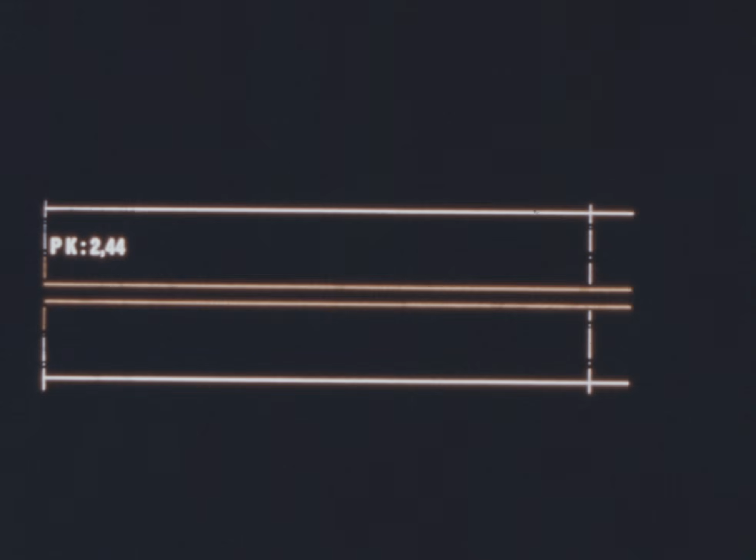The roadway was originally built with 2 lanes, in sections starting from Paris between 1958 and 1966, in the departments of the Val-de-Marne, the Essonne, then of the Seine-et-Marne. Later on they were widened.

The importance of this route and the age of the road surface led the Cetra to organize an operation of continued monitoring on the sections under its control. The West Parisian Regional Laboratory has perfected and applied a method of examination which revealed as early as 1974 some unfavorable situations concerning the support of the slabs.

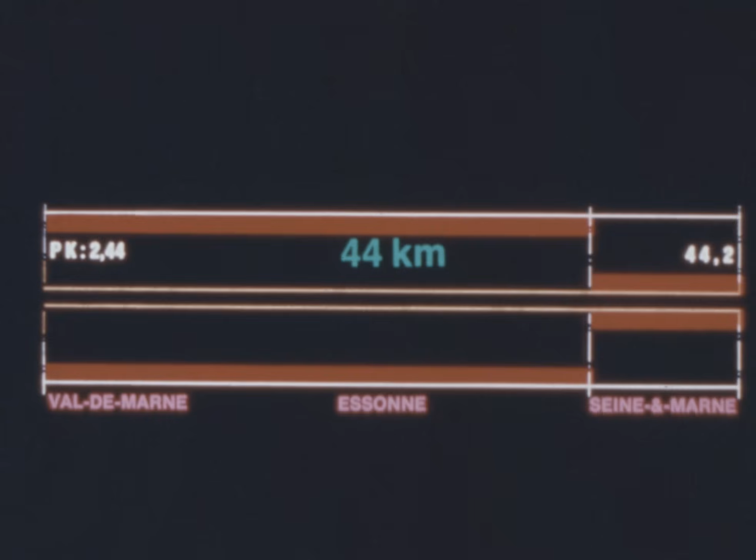Surveys effected in 1977, 1978 and 1980 by means of the GERPHO confirmed that certain sections of the A6 freeway had reached a critical phase of evolution. The diagram of the development of the deterioration factor resulting from these measures illustrates this.

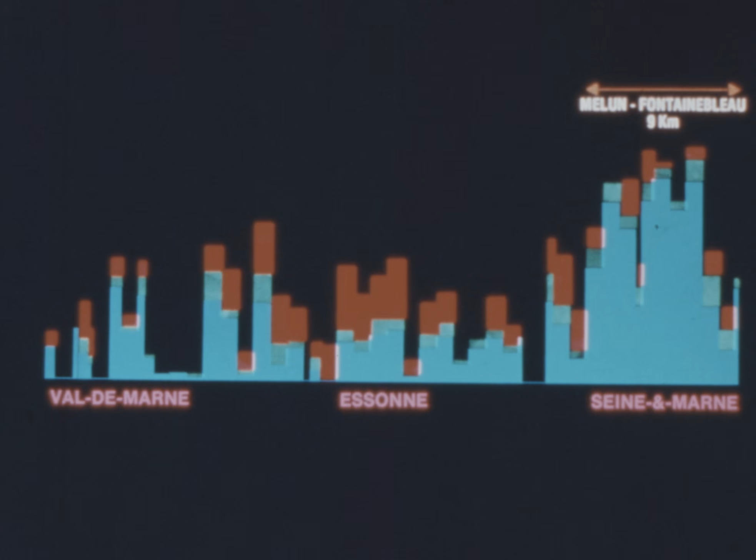A work program was determined for the entire route. It was decided that in 1980 priority would be given to the section situated between the junctions at Melun and Fontainebleau, a distance of 9 kilometers on the Paris-bound roadway.

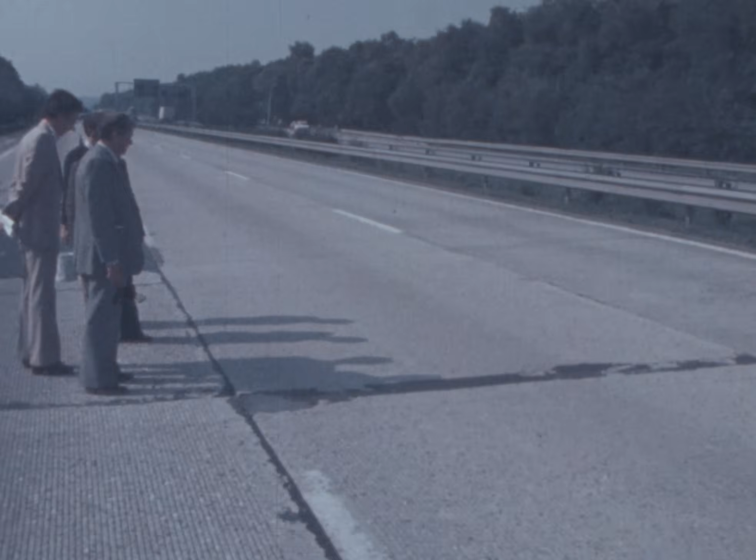Closer investigation led to a decision to keep a part of the treated shoulder for emergency stops and to maintain the middle lane in its present state on condition that some of the slabs should be repaired.

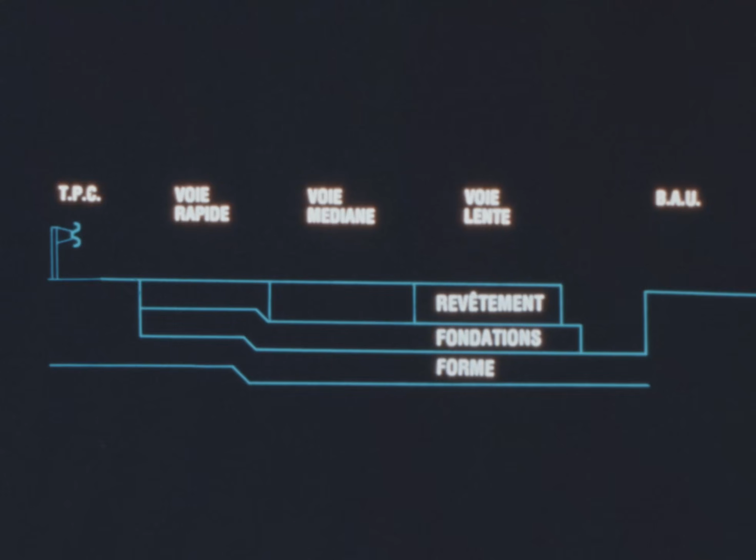A list of the faults, drawn up slab by slab, proved to be a most useful work document during the construction period. The following measures were specified in the work contract: demolition of part of the treated shoulder for emergency stops, demolition of the slow lane comprising a concrete surface 28 centimeters thick on a 15 centimeter cement treated base,

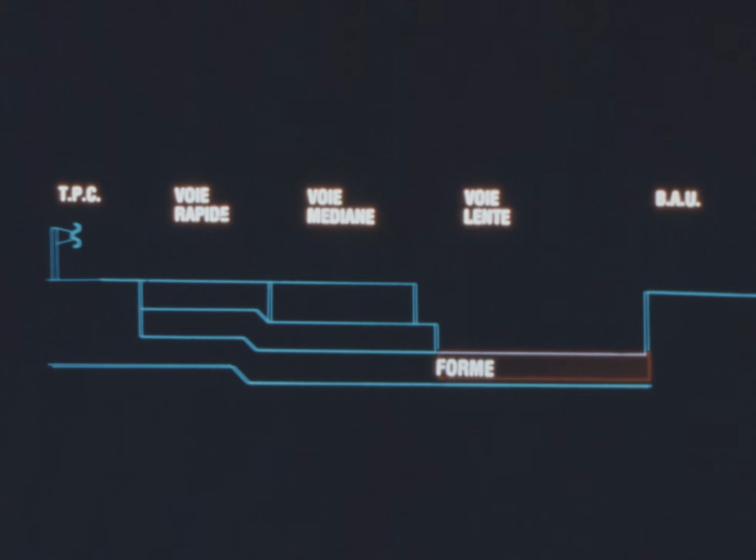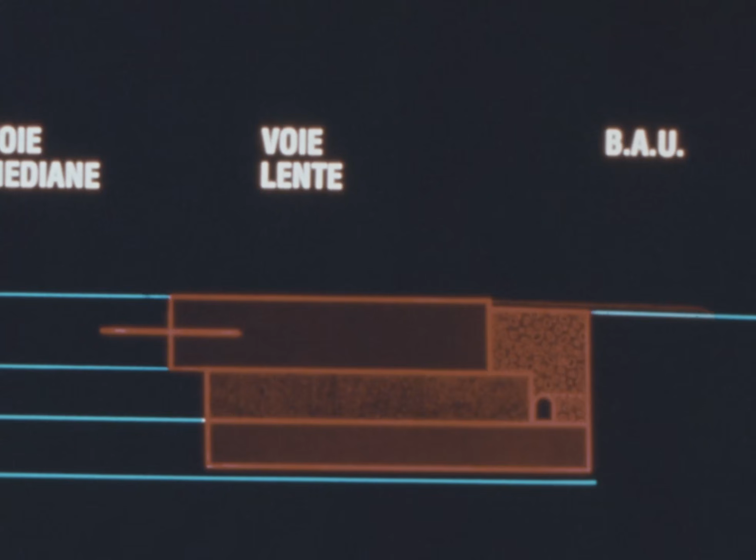preliminary treatment of the sub-base to a depth of 30 centimeters, reconstruction in accordance with the indications of the structural list, 15 centimeters of lean concrete base, 28 centimeters of concrete surface layer, establishment of a treated shoulder for emergency stops with drainage, renovation of some 100 slabs in the middle lane,

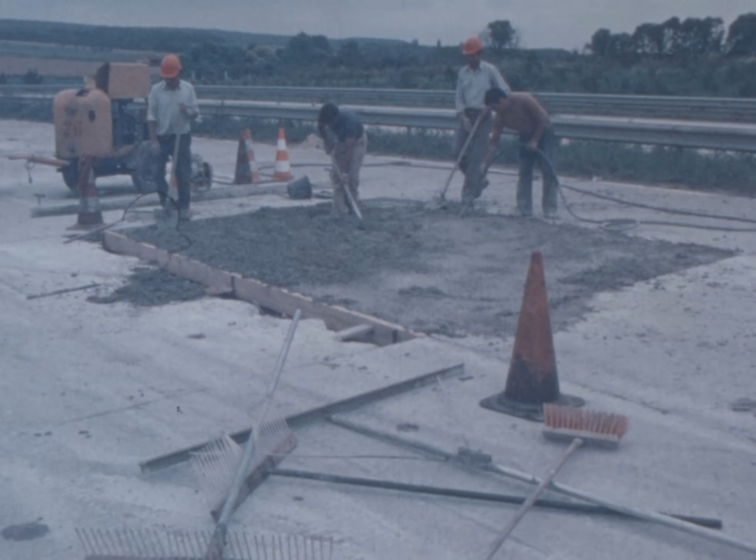repair of slab corners by means of hydraulic and polymer mortar, transverse grooving of the middle lane, and renovation of the impermeability of the joints.

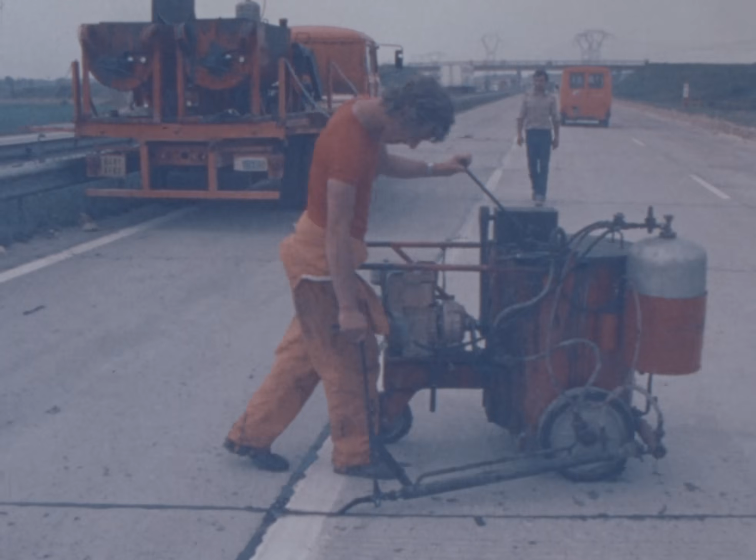The time schedule for the work involved on such a site had to take into account not only the restrictions affecting the road users, but also the possibility of carrying out the work within the allotted time. The need to minimize the duration of the construction job led us to rule out those months during which weather conditions are likely to be unfavorable, the best period for the work being situated between May and October for a total work time of 3 months.

Had the work been carried out in May, June or July, it would have incurred the following drawbacks: traffic congestion 10% greater than in August, September and October. Disturbance of the traffic during July, the busiest month of the year. And finally, the many non-working days in May would have led to a lengthening of the duration of the site.

The Departmental Direction of Equipment of the Essonne therefore decided that the work should take place during August, September and October, its various stages being adapted to traffic estimates. In the southbound direction from Paris, traffic was always maintained on 2 lanes. Going towards Paris, 2 separate stages were determined.

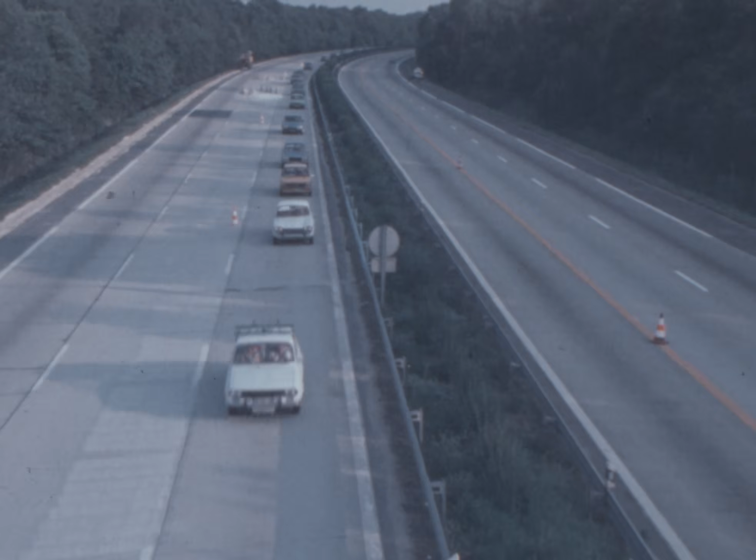From the 21st of August to the 30th of October, traffic circulated on 2 lanes during working days. An extra lane was added to complete the system for the weekend return journeys, that is, 3 lanes in the direction of the busiest traffic in accordance with the normal capacity of the freeway.

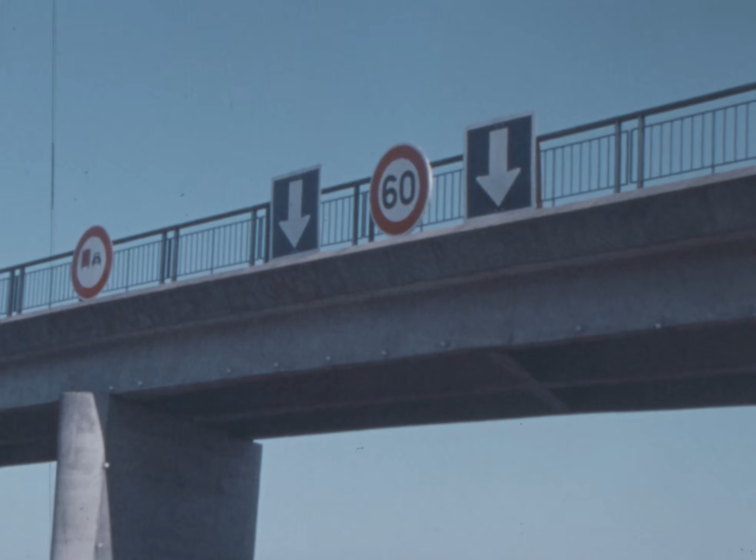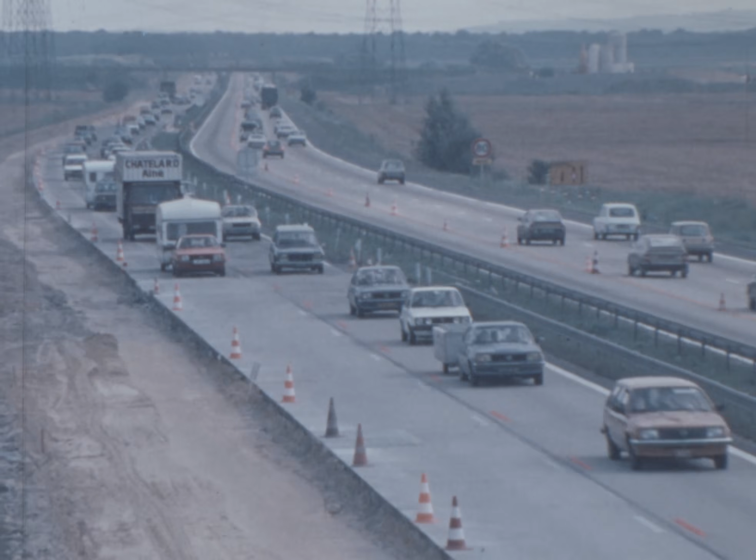Consequently, the heaviest summer traffic loads of the beginning and of the end of August were able to take place in satisfactory conditions due to the exceptional measures decided upon for this work site: radio hookup between the police force, the work site and the Regional Centre for Highway Information, analysis of traffic flow by an airplane of the Regional Equipment Direction during the heaviest traffic load periods.

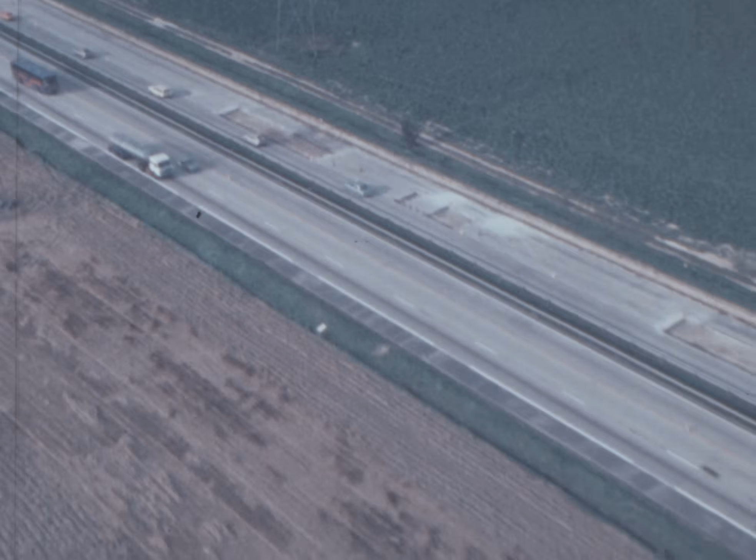These measures complemented the usual means of information for road users, such as signs indicating recommended routes and the distribution of leaflets.

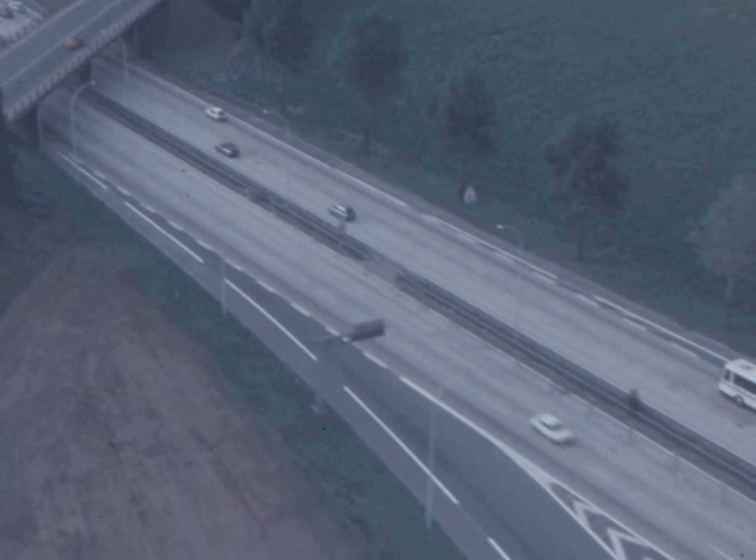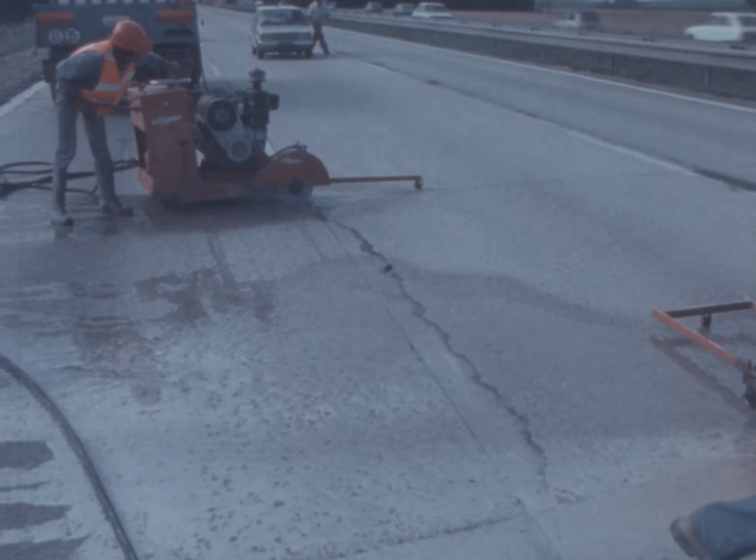The first stage was mainly devoted to the repair of the fractured slabs of the middle lane. After cutting the joints, over 100 slabs were demolished by a concrete breaker, and the blocks reserved for crushing were placed in a stockyard.

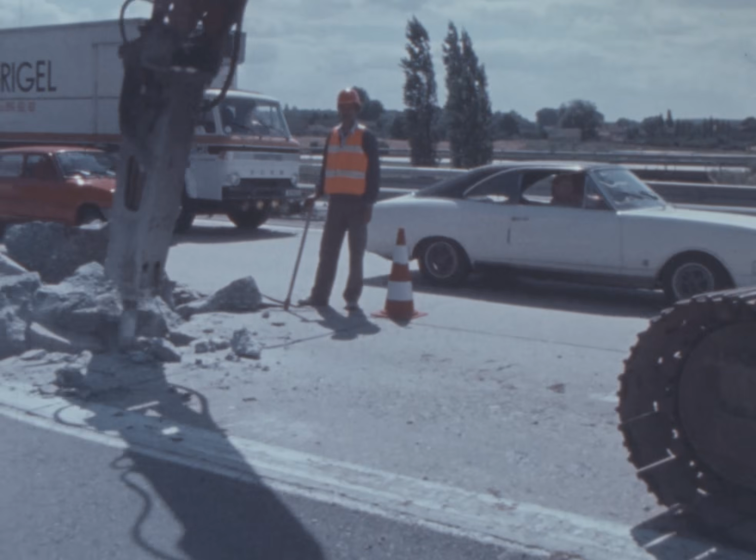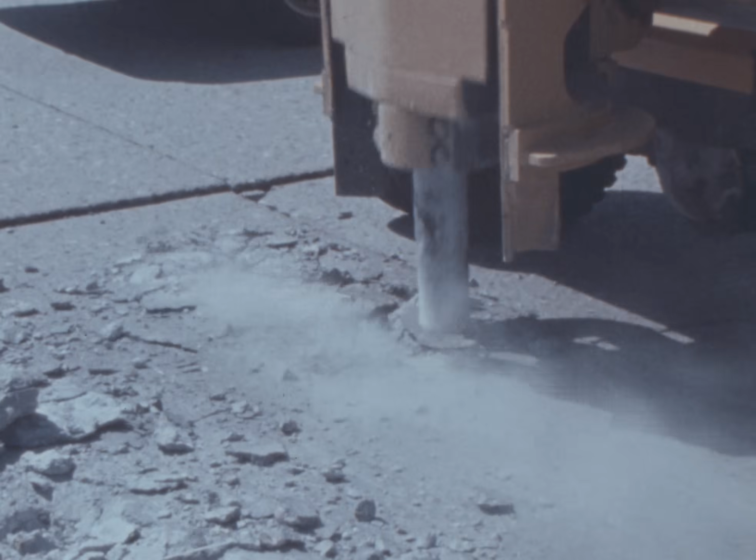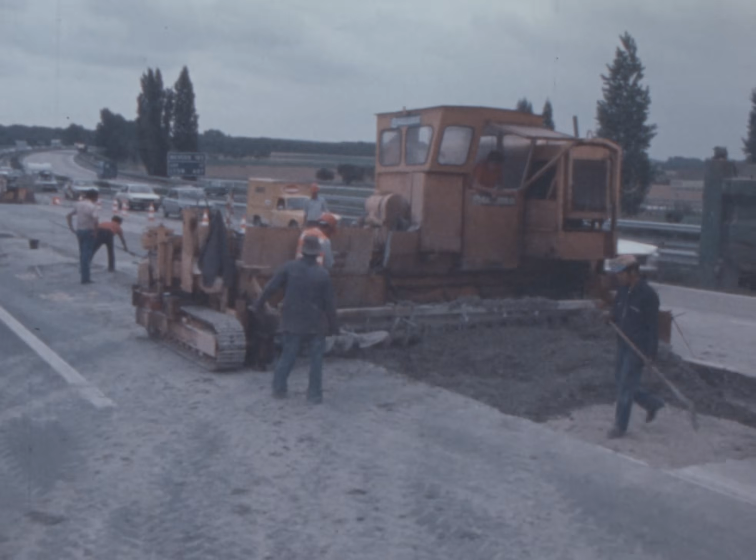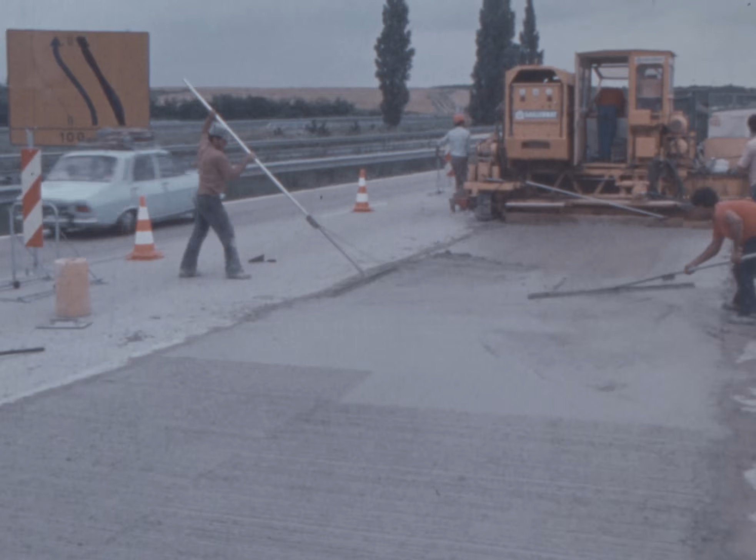25 slabs were thus dealt with each week from Monday to Wednesday. On the Thursday and Friday, they were rebuilt with concrete containing HPR, high initial resistance cement, so that by the weekend the emergency vehicles could circulate. In 24 hours, the compression factor is of 250 bars and of 300 bars in 48 hours. These results are sufficient to make the process suitable for concrete sites when it is necessary to put the roadway back into service rapidly.

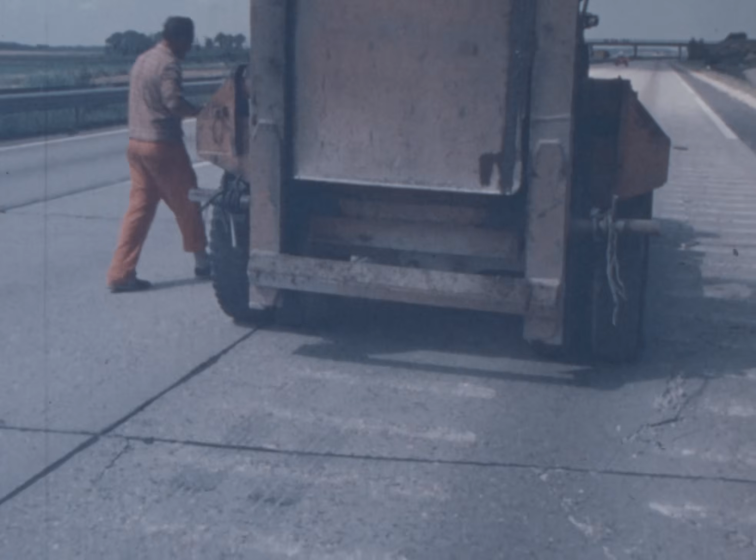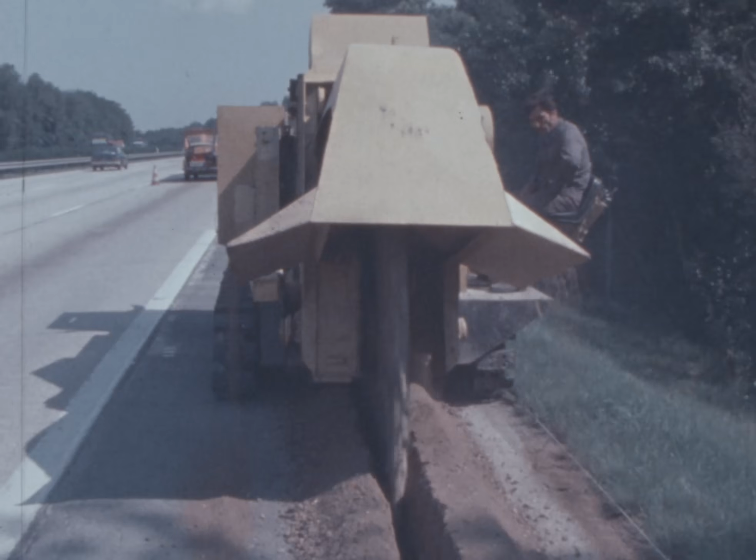At the same time, the following work was undertaken. Demolition and removal at the rate of 3,000 tons per day of the concrete and cement from the slow lane after reaming of the treated shoulder for emergency stops and of the base layer. Treatment of the sub-base with 5% of cement to a depth of 30 centimeters.

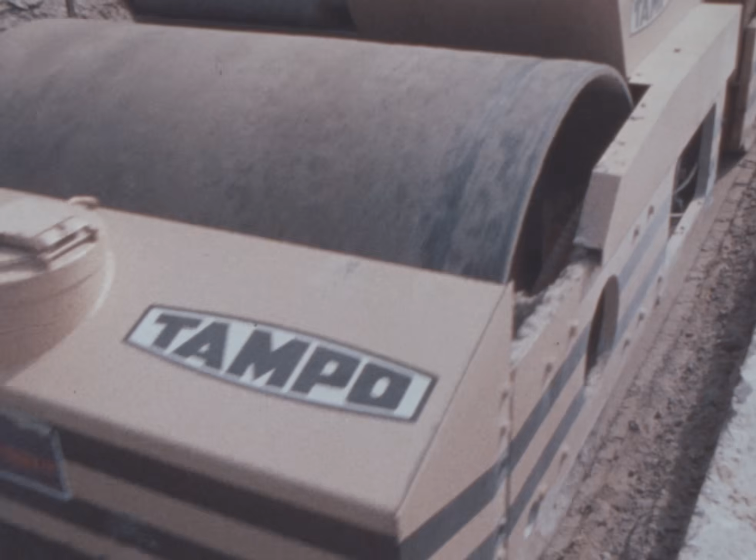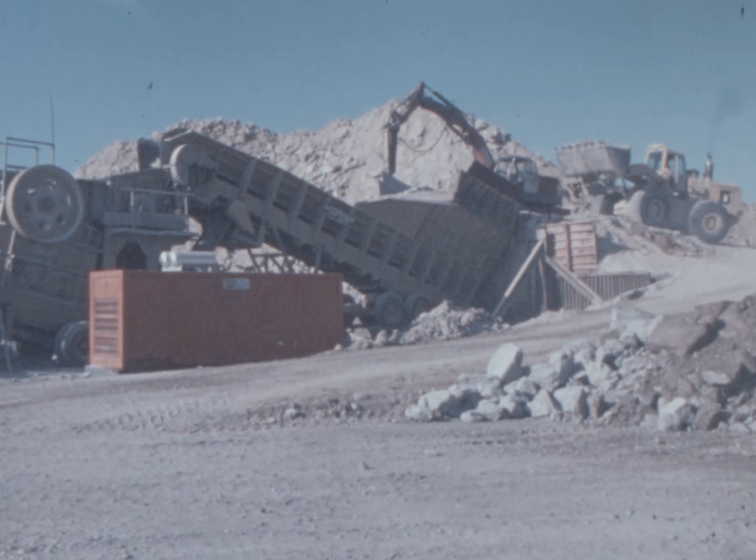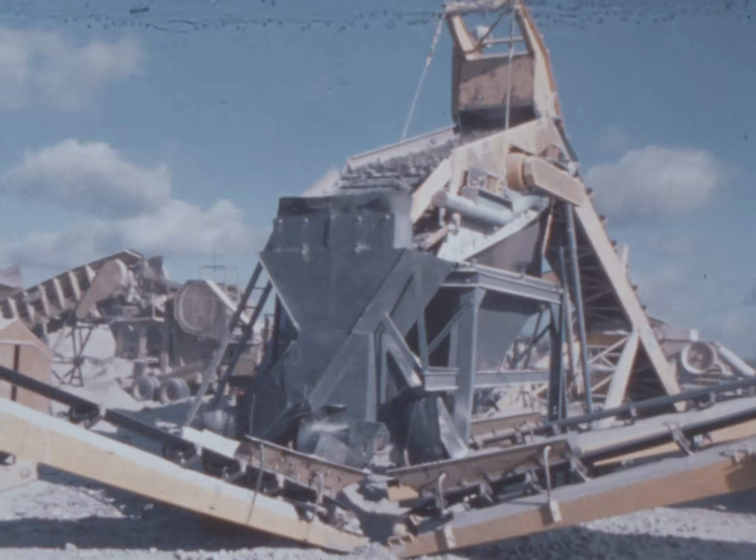With a view to their reuse in the lean base concrete and in the porous concrete which formed the lateral drain, the 25,000 tons of products retained from the old concrete roadway were crushed as the demolition proceeded. The crushing and grading station, set up close to the concrete mixers, produced at an average rate of 100 tons per hour a sand size 0/5, small gravel 5/15, and gravel 15/35.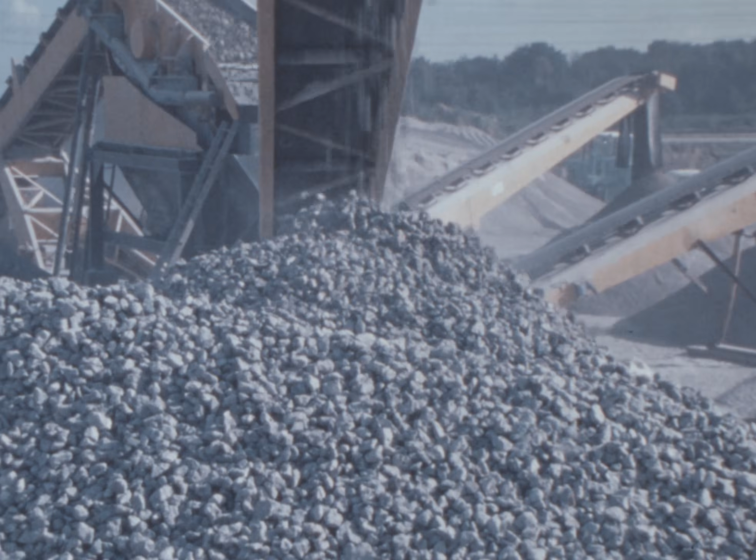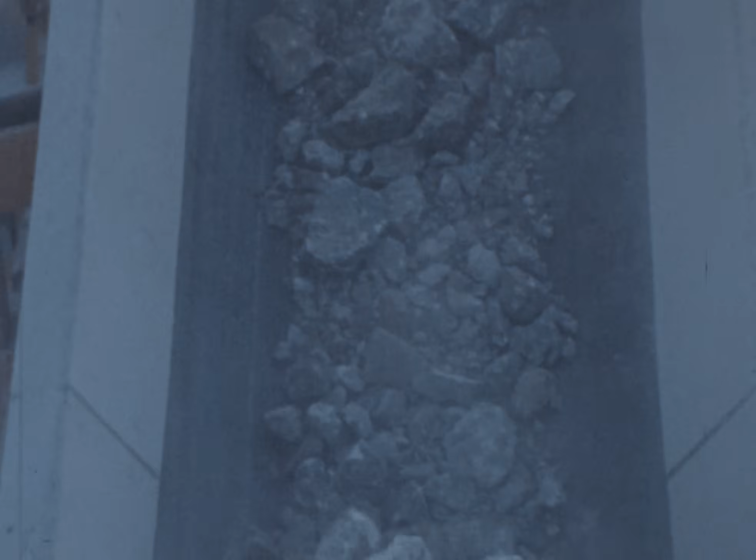On the repair site of the A1 freeway, it had not been possible to mix into the concrete the sand produced by crushing, because it contained too many varieties of fines to be used again. On the A6 freeway, on the other hand, moistening of the construction material by spraying water under high pressure on the crushing station stabilized the fines content of the sand. It could in this way be used again in the base concrete and the porous concrete. This setup eliminates the dust and so widens the possibilities of utilization of demolition byproducts.

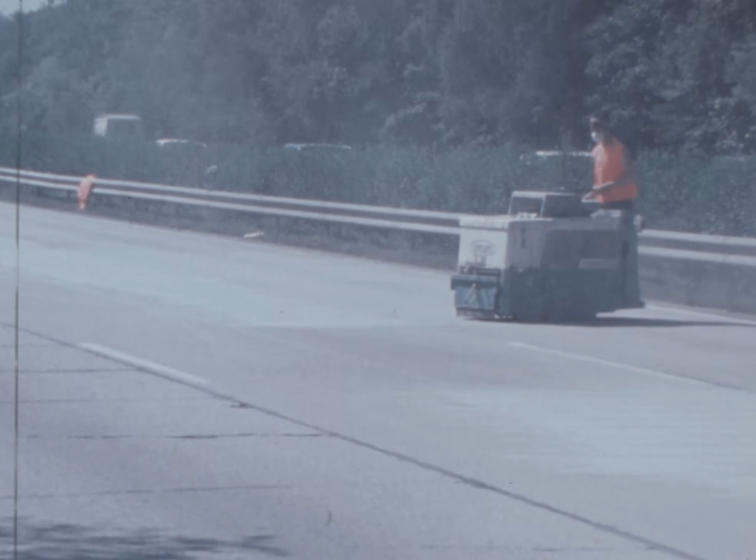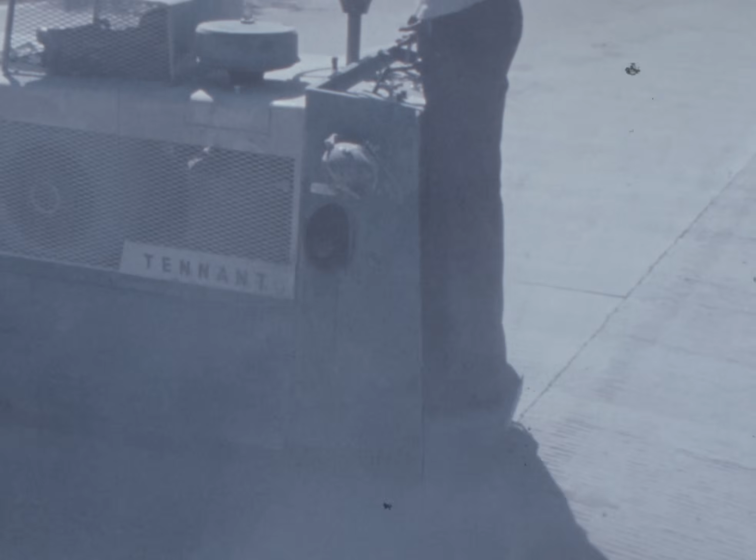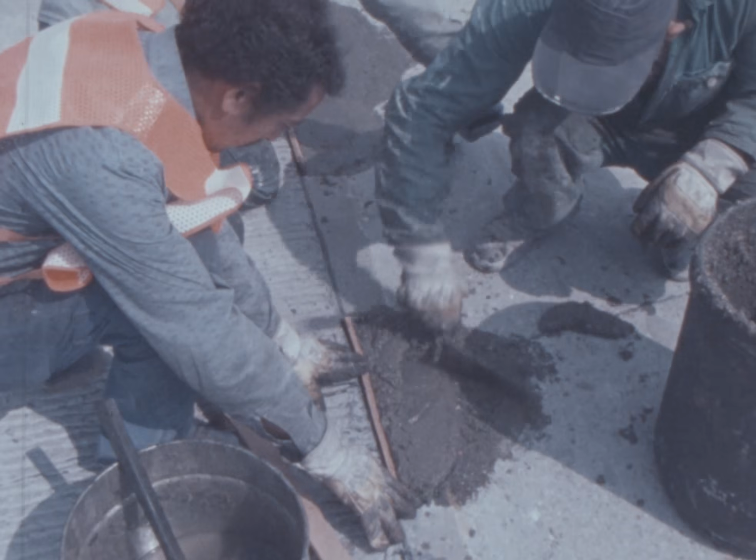Various other work was carried out during this first stage. Transverse grooving of the middle lane at the rate of 1,000 square meters per day, repairs by means of hydraulic and polymer mortar, renovation of the 25,000 meters of joints of the remaining lanes.

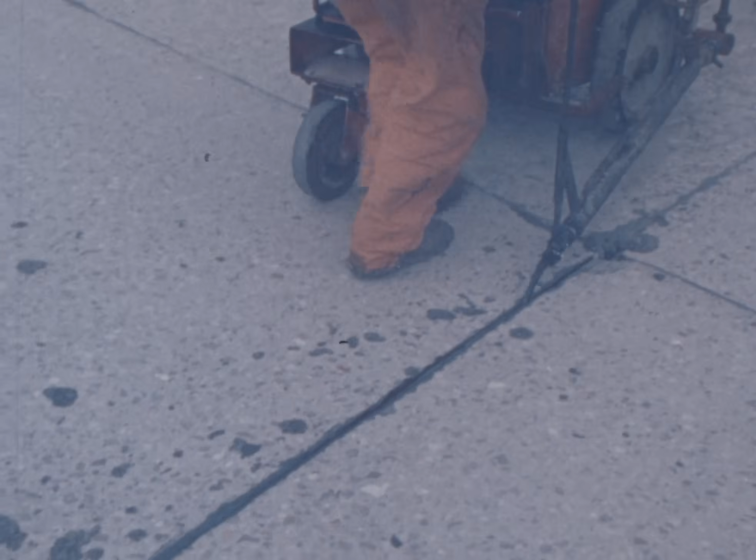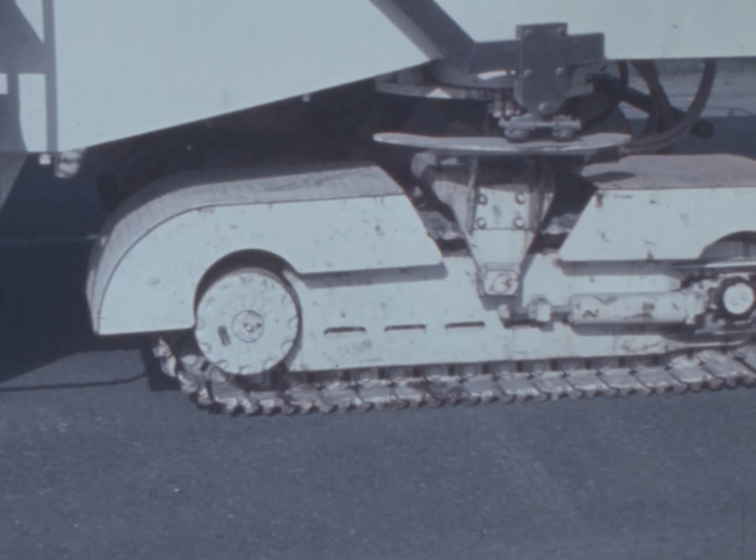The removal by planing of a 500-meter section of asphalt pavement enabled it to be recycled and used again on the treated shoulder for emergency stops.

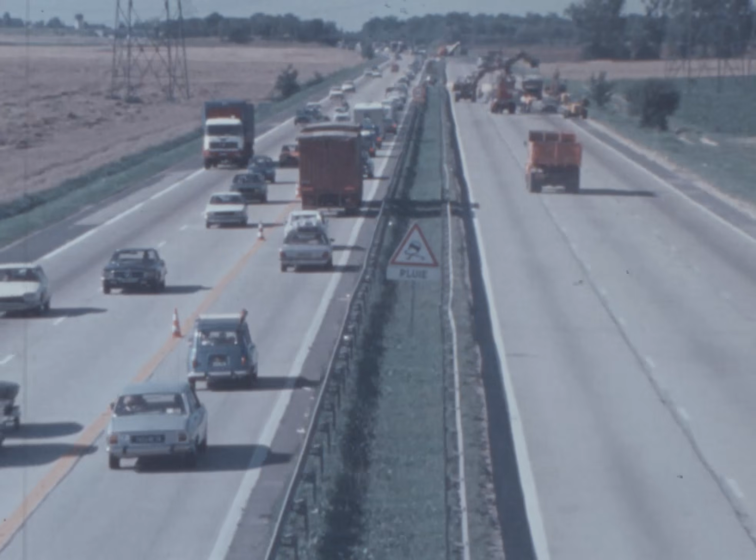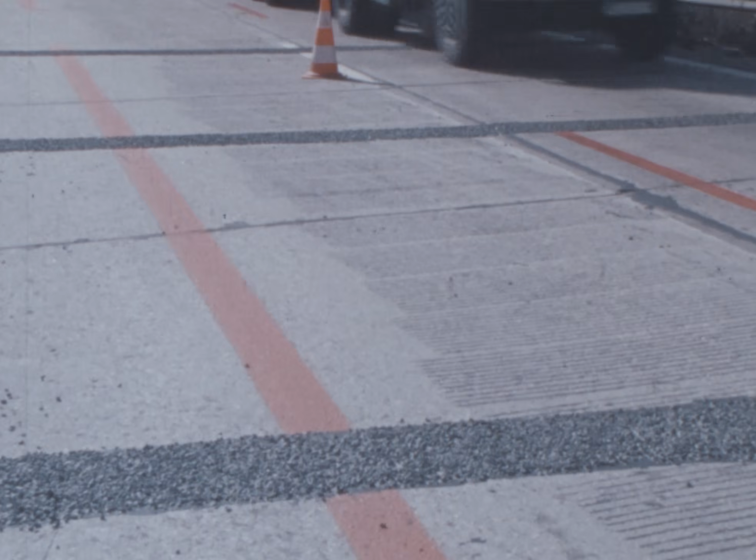There were no particular safety problems on the site during this period, as the northbound lane towards Paris was closed. On the other hand, traffic facing the wrong way in single file on the opposite lane, with no shoulder for emergency stops, made it necessary to take very severe safety precautions, notably additional signing with information every 500 meters, continuous placing of safety devices, and constant supervision by day and by night.

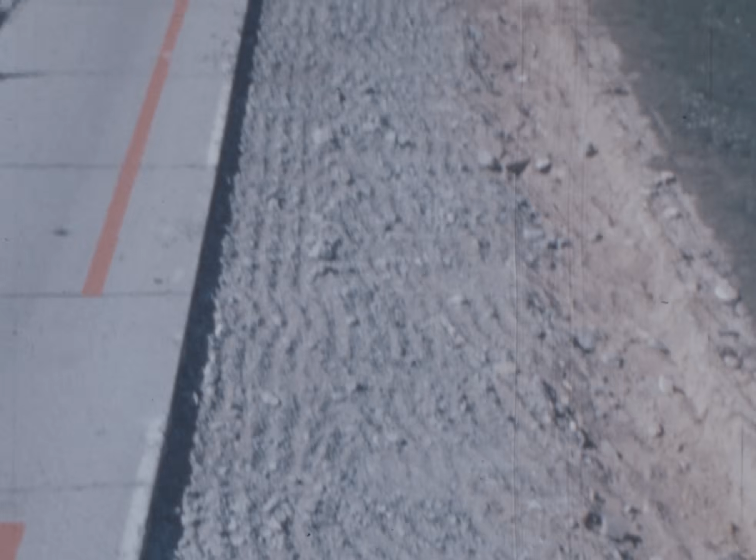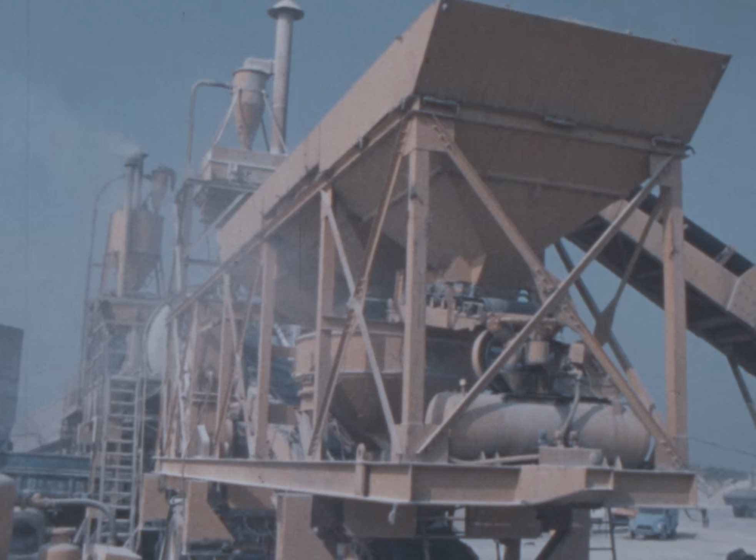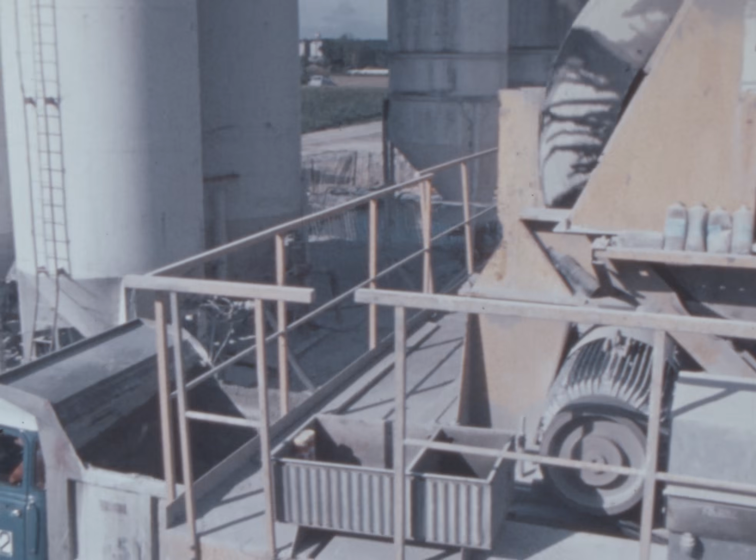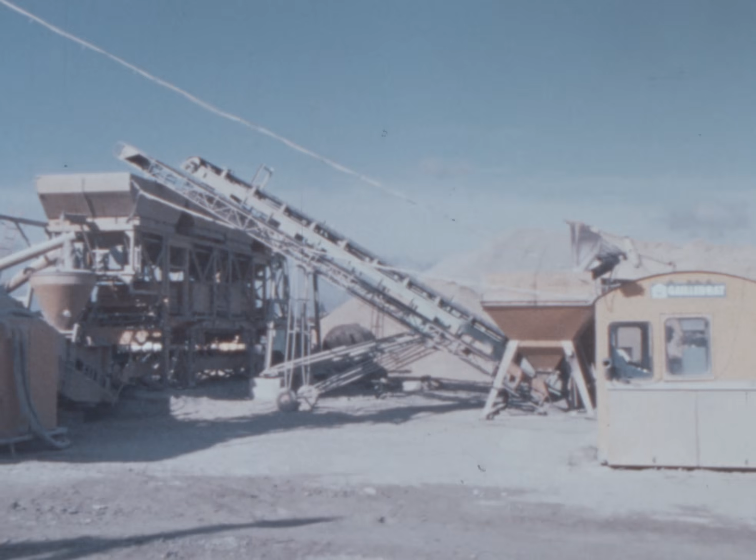When the holidaymakers had returned at the end of August, the second phase of the work was begun, that is, continuation of the demolition and treatment of the sub-base, then high-speed concreting. To keep within schedule, very important material means were used. For example, to make the concrete, the contractor's firm, Droits, set up on the site 2 automatic SGME plants, whose capacity was respectively of 300 cubic meters and 80 cubic meters per hour. These mixers are equipped with recording devices to assure the correct weight of each ingredient, the admixture, and the operating character of the plant. Consequently, uniformity of the batches could be verified at any time.

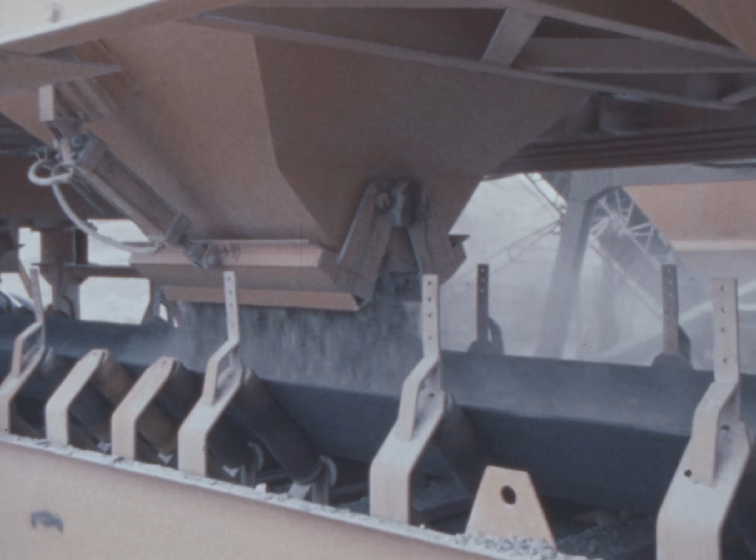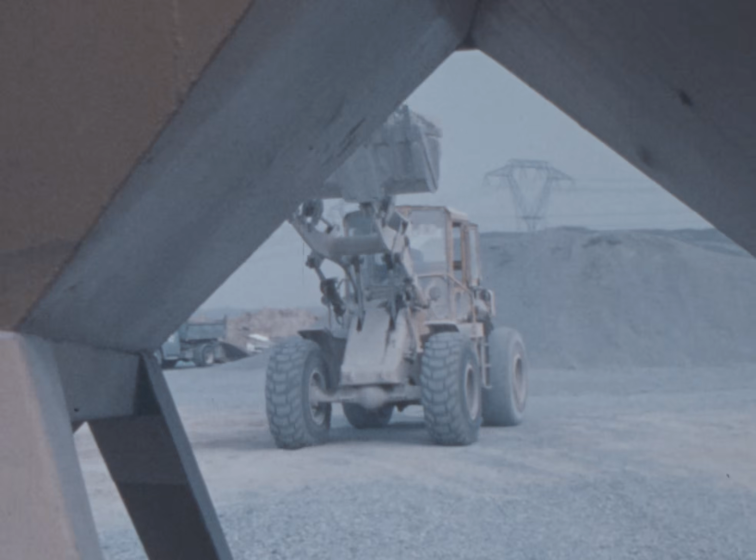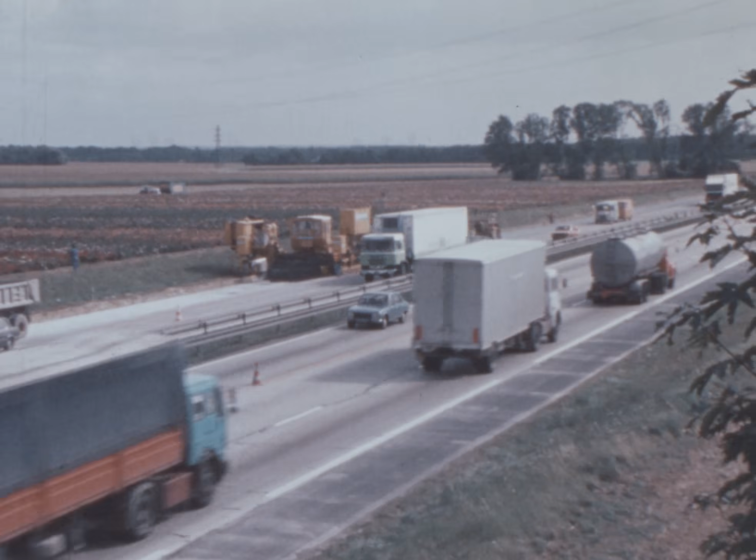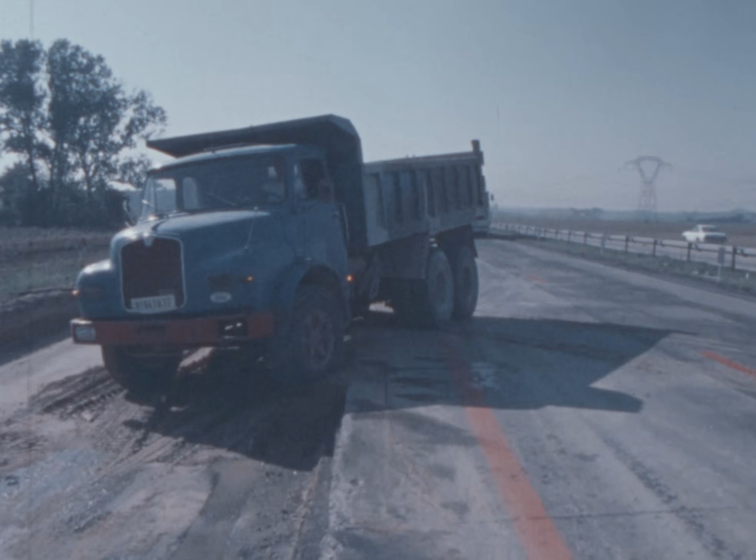The various types of concrete were laid by a Guntert Zimmerman slip-form paver guided electronically along cables. The machine advanced at a rate of 900 linear meters per day. On very wide concrete laying sites, the mixing of the concrete limits the progress of the paving machine. In this case, their advance was slowed down by the maneuvering of the supply trucks.

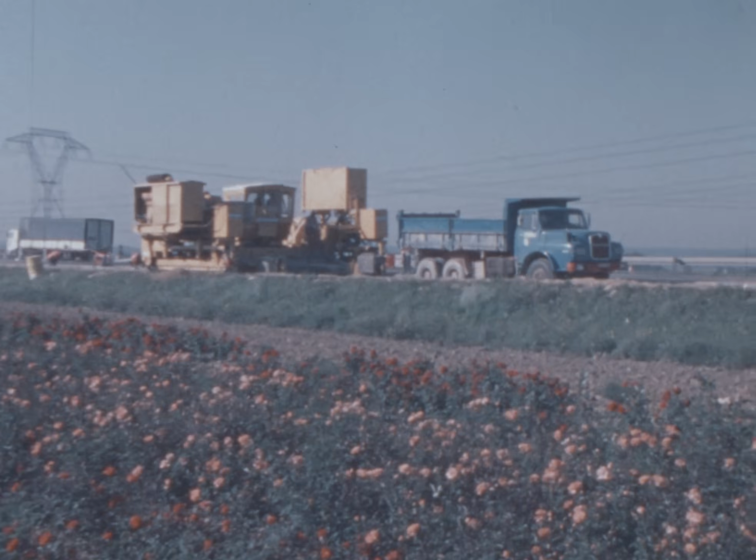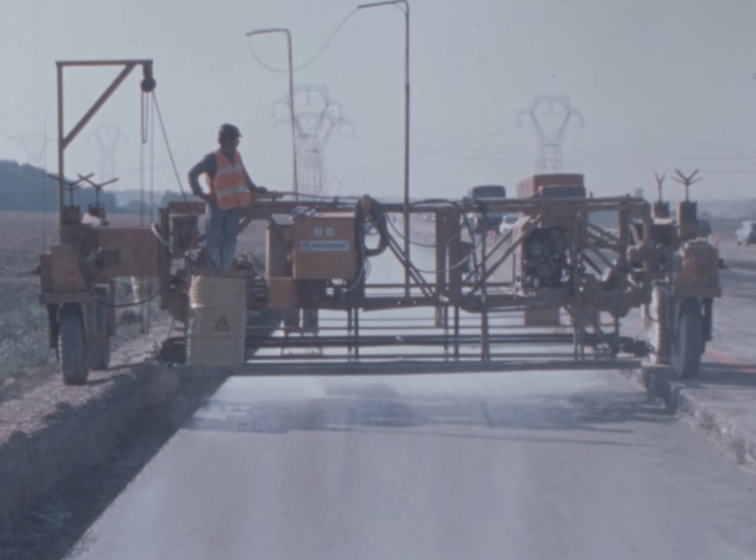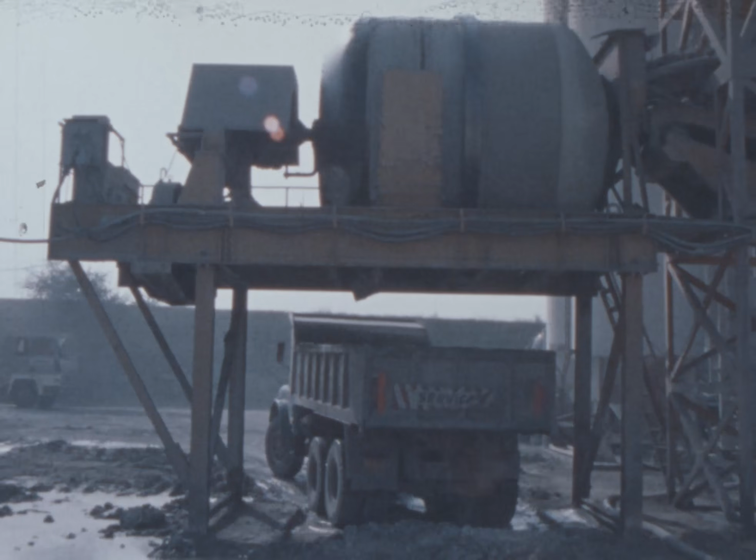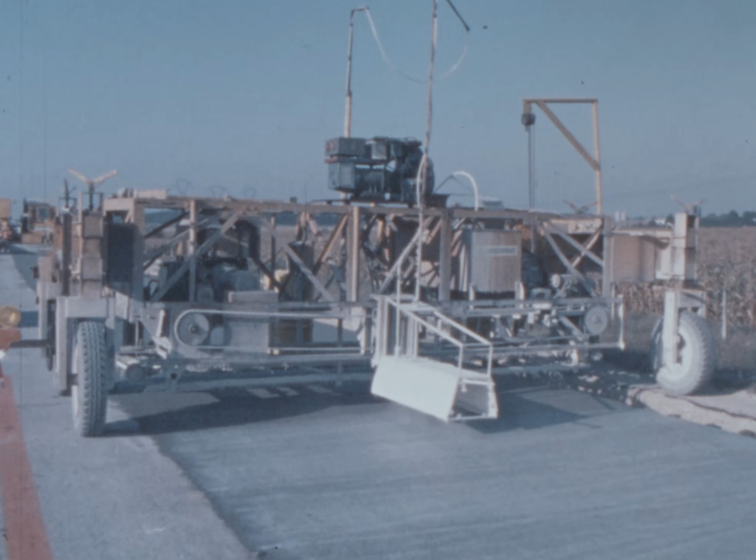To avoid the problem of reflective cracking, a layer of reinforced curing compound was applied to the foundation, whose surface needs to be as smooth as possible. Spreading of the product and the transverse grooving were done by the same machine. The transverse joints were cut by multi-blade machines from 12 to 18 hours after the laying of the concrete.

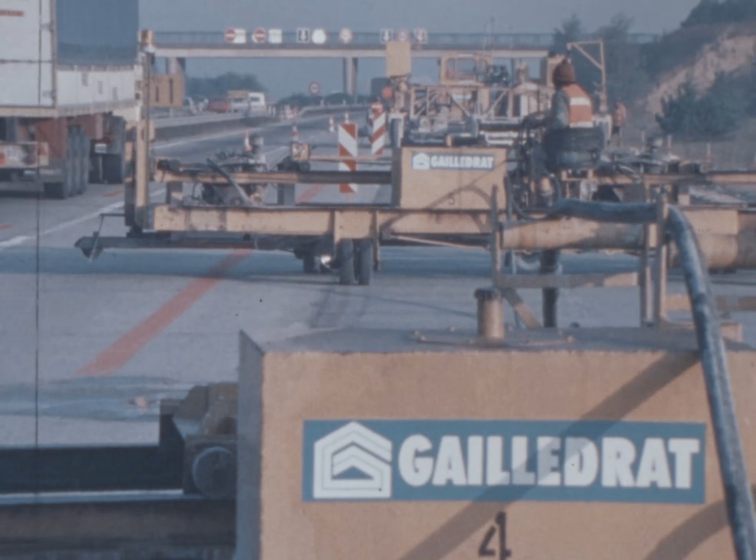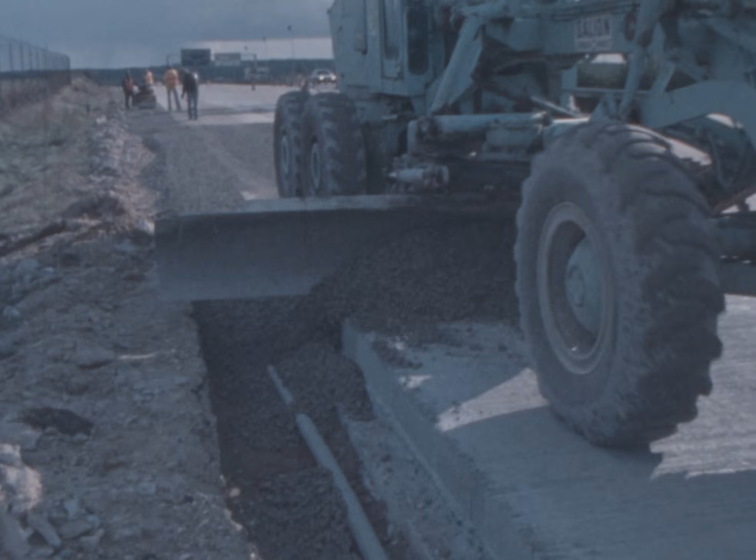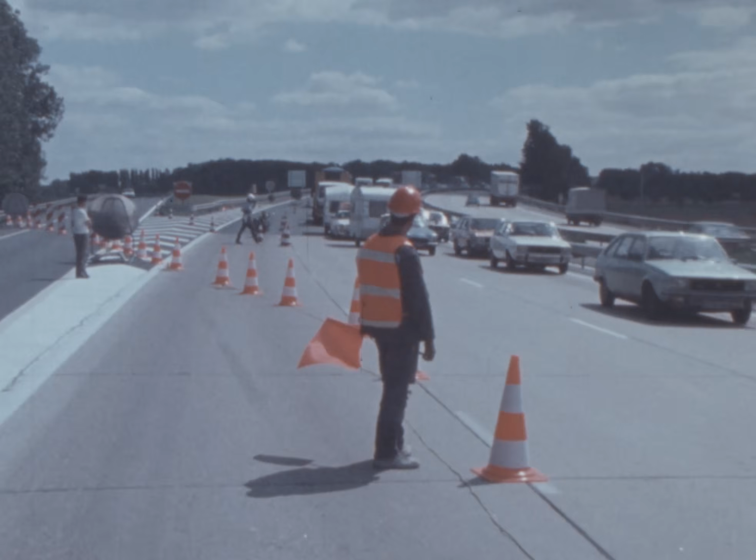The excavation left open between the concrete paving and the retained part of the shoulder for emergency stops was filled by a porous concrete which will provide drainage for the entire roadway. On the roadway under repair, it was necessary to maintain a permanent fast lane for the traffic and to reopen an additional lane at weekends. These obligations led to important safety problems due to the coexistence of the traffic and the worksite on the same roadway.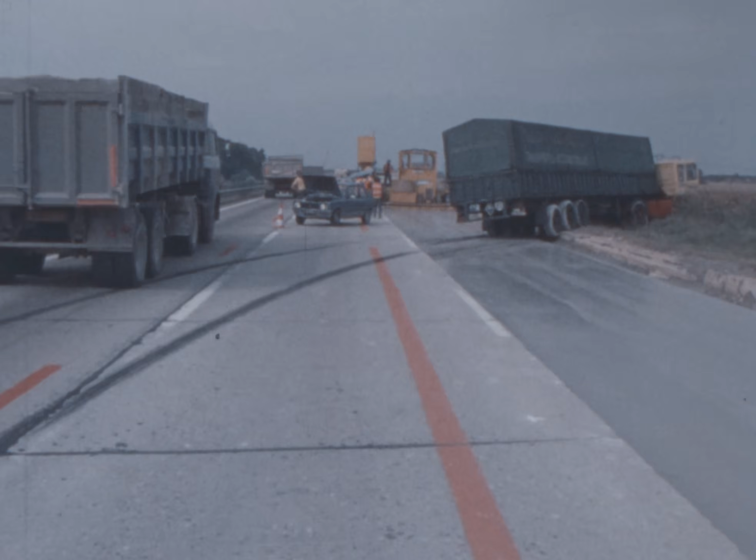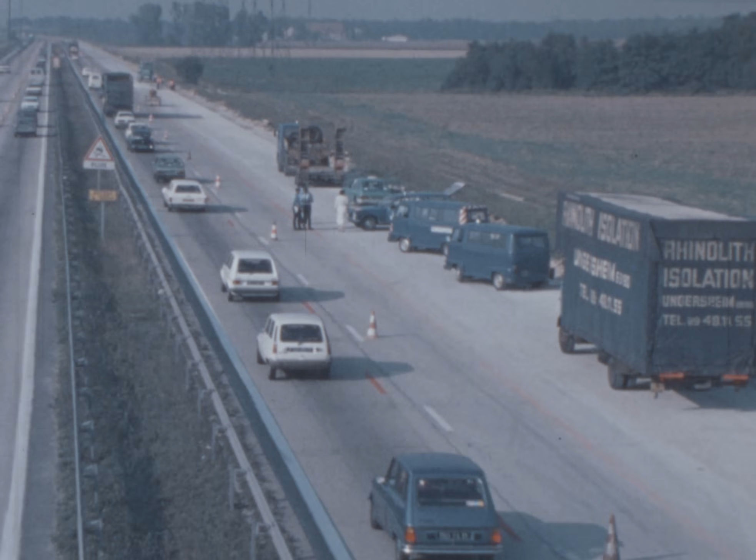The contractors had to deal with many major constraints, but their constant worry was the excessive speed of the vehicles. Only the presence of the police force can bring some solution to this problem. It may be useful to emphasize certain specific aspects of this worksite, which was carried out under traffic conditions. As many different types of work are involved, efficient coordination is necessary at all levels: equipment, police force, and contractors.

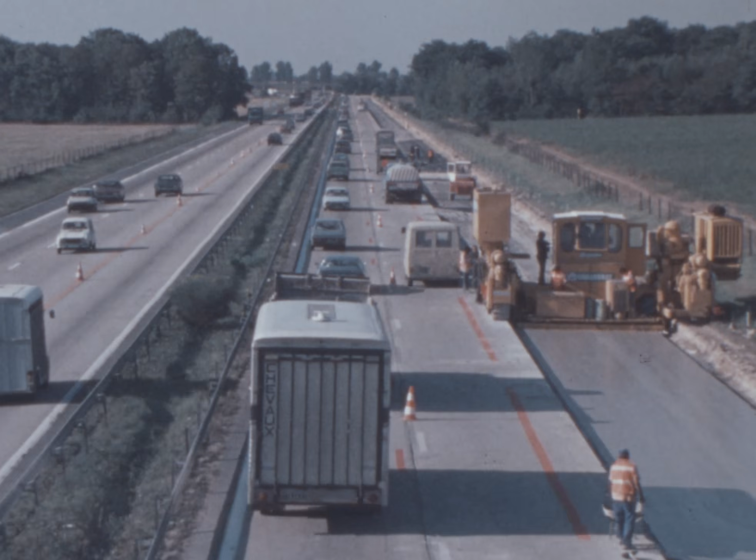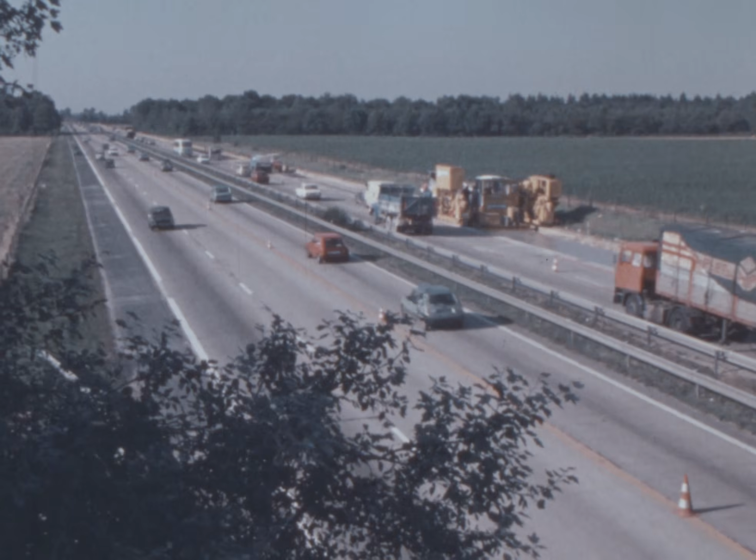Meticulous preparation is essential. Work and safety constraints prescribe production methods that are free of risk and occupational hazards. And the construction technique of concrete roadways can be adapted to the most difficult problems. This is how the worksite of the freeway to the sun could be undertaken in favorable conditions.